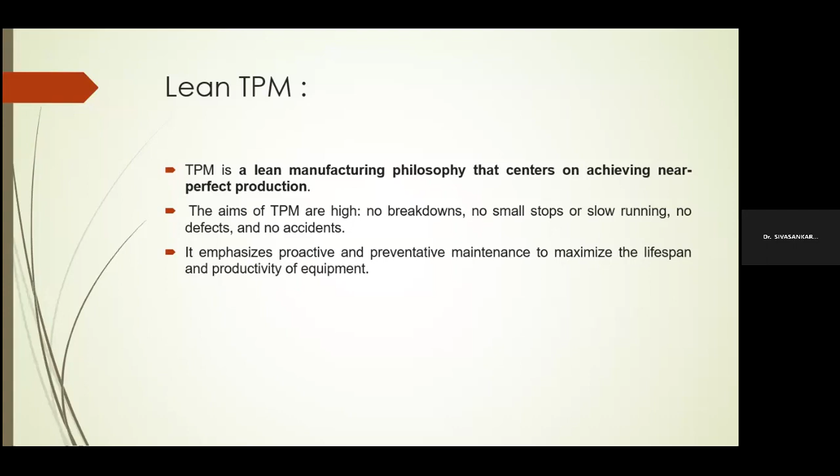So at the same time, the lean manufacturing strategy clearly focuses on both proactive and preventive maintenance systems to improve the productivity measure of the equipment. So the further presentation of the slide gives the following information.

So TPM mainly focuses on total employee participation, of their own machineries, tools, and other gadgets, whatever they have on the shop floor, in order to maintain the uptime - the production uptime. That is nothing but the availability of usage.

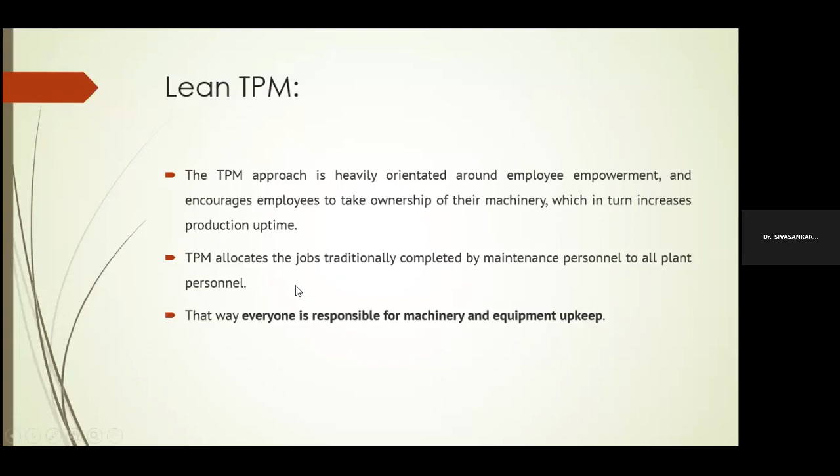So the machine should be continuously available during the production hour. None of the machines should be kept under idle condition, right? So this is everyone's responsibility for keeping the machinery and equipment operating under a continuous state, right?

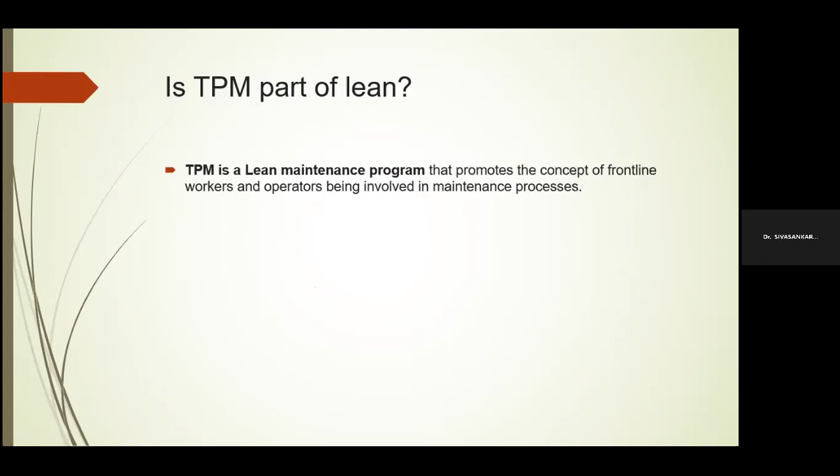So the TPM is just an overall guideline, under which we can form lean management tools and techniques in order to fasten the guidelines more optimally by educating the workers and machine operators who are involved in the maintenance process. It is just a sub-module. The lean maintenance program is a sub-module that can be connected to the TPM, the total productive maintenance.

There are some facts that tell how TPM and lean are equally related to each other. The goal of lean manufacturing is to minimize waste, like wastage due to overproduction and wastage due to over inventory. Lean manufacturing will not compromise with excess raw material inventory and overproduction. What is required to be manufactured and at what time we want to release the plan of schedule, that is a production plan of schedule. Everything should be streamlined in a well-defined manner to maximize production efficiency.

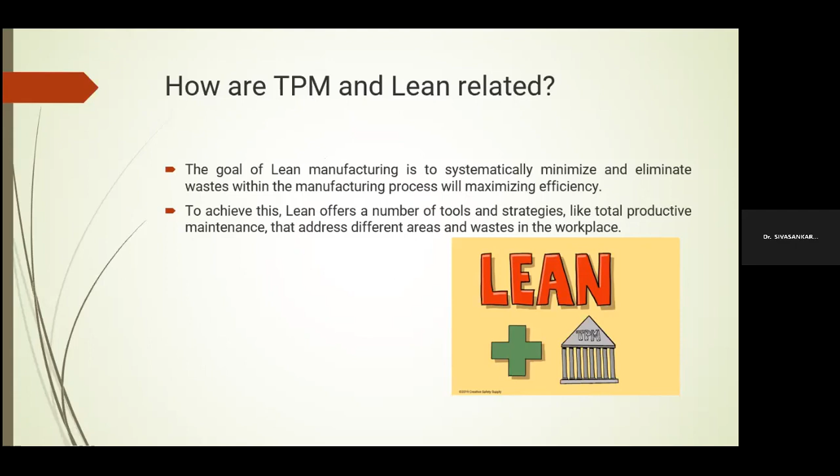To achieve this, lean has a number of methods like single minute exchange of die, Kaizen, Pokayoke, and just-in-time manufacturing. These are some of the tools and methods coupled in the lean management philosophy. The total productive maintenance aims to address different weaker areas by eliminating waste within the shop floor system. In this way, lean and TPM are interrelated with each other.

Coming back to the continuation, these are the remaining supporting information given in the next slide. TPM is one of the most challenging and difficult strategies to implement in a practical shop floor layout, because it requires people's contribution and understanding between people of different mindsets. So TPM expects teamwork and strong employee morale.

At the same time, they should have knowledge about each and every machinery and the parts' working function. If any part is not functioning well, they should know how to repair and rectify the problem. These kinds of skills the people must have, and everything should be done with strong morale without violating the basic professional ethics within the organization.

So this is the final point to be stated, interrelating both lean manufacturing strategy and TPM. Both are equally related to each other.

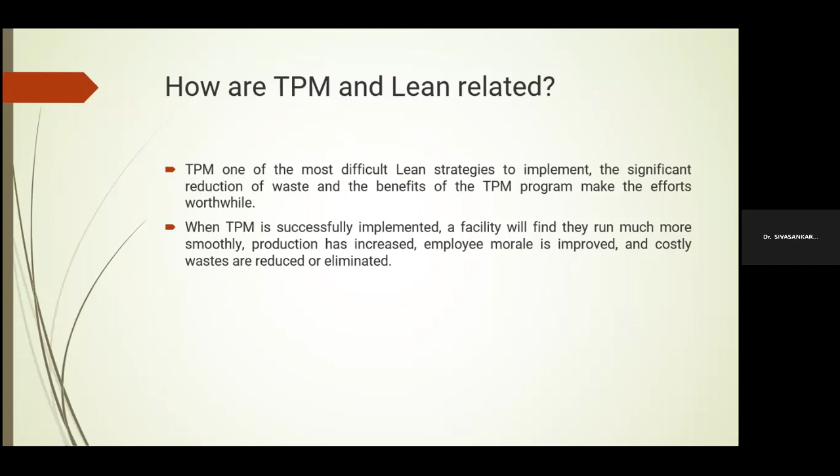So how to create a lean maintenance program first within an organization? As we already know, TPM has got 8 pillars that we saw in session 1, the introduction program. All the 8 pillars carry responsibility in improving equipment usage by maintaining them more dynamic and reliable, increasing the long service lifetime of the equipment.

While starting a TPM program, initially we should put effort into planning and decision making in order to undergo the proper idea of implementation into the real system. This will take a lot of contribution from training operators, forming middle level committees, performing evaluations in developing the plans, and much more. It requires a lot of people's support in implementing these work procedures.

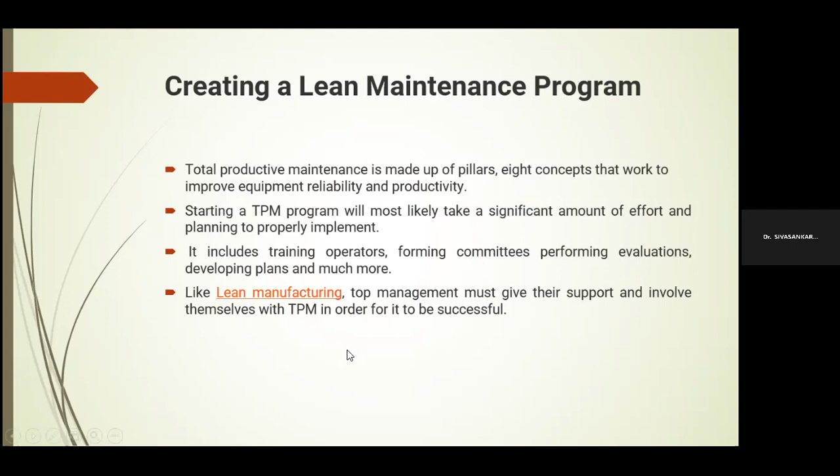Like lean manufacturing, the top management role plays a major thing that can be involved along with TPM to make the work process more successful and easier to follow. While creating a lean management program, you should understand what the problem is and how we are going to work it out, and whether the problem can be communicated better to people from various domains. We have to ensure that before forming any work procedures.

Now coming to lean thinking and methodology - how lean management can be brought more alive into the workplace along with the TPM strategy. The total productive maintenance system strives to improve and maximize the overall equipment effectiveness of a production machine tool, by reducing the number of accidents and careless mistakes done by the operator within a given hour of shift.

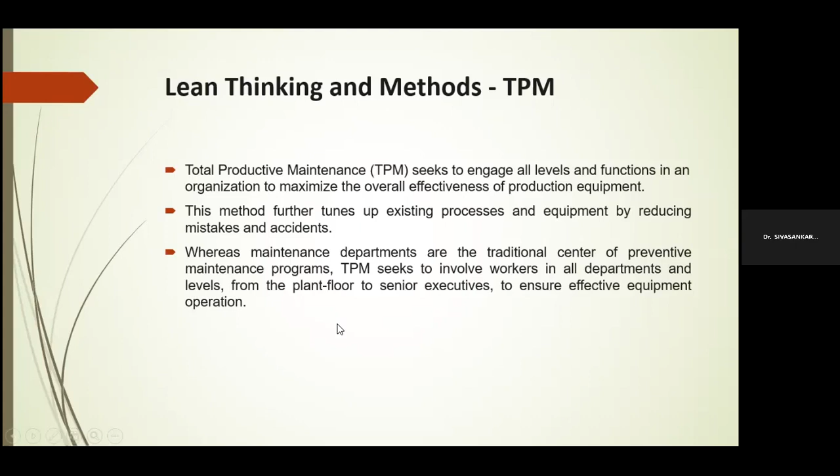The maintenance department in every industry is the primary center for all kinds of training programs and safety related issues that are implemented from time to time. TPM must seek to involve every worker from all departments within the shop floor level, starting from the plant floor to senior middle level executives, in order to make the proper functioning of equipment operation error free.

The TPM addresses the entire production life cycle and creates a solid build plan to prevent accidents and future defects and other breakdowns which are likely to happen every now and then. So TPM focuses on measures like the preventive maintenance system and mistake proofing, which is nothing but poka-yoke. These are the two things we are going to discuss in the methodology part.

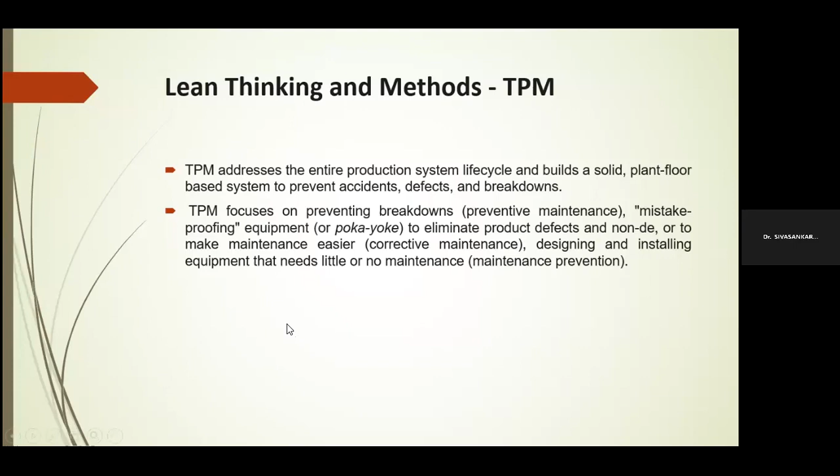By using these focused improvement techniques, we can improve the process procedures within a less span of time. So the goal of TPM in the lean concept is to eliminate a number of losses, say breakdown losses, setup losses, idling and minor adjustment losses. These are the different types of losses, and the root cause for these problems we are going to see in the next parallel slide.

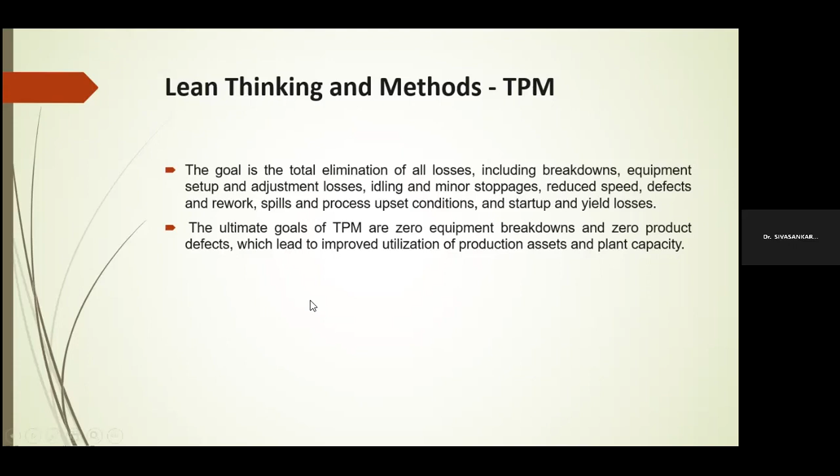The ultimate goal of TPM is nothing but zero equipment breakdown, which speaks about the improved utilization of machines, long usage of machines, and we can increase the plant capacity by producing more products by maintaining the equipment in a trouble-free condition.

Now we will see what methods and implementation approach we will continue with in the present slide. TPM mainly focuses on ensuring the successful functioning of machinery by minimizing the frequent number of breakdowns, by insisting on more efficient maintenance strategies like preventive, corrective, and autonomous maintenance.

So here we are going to see some of the losses, the 5 major losses. These result due to a number of faulty problems that may occur during the operation cycle. These are listed out here.

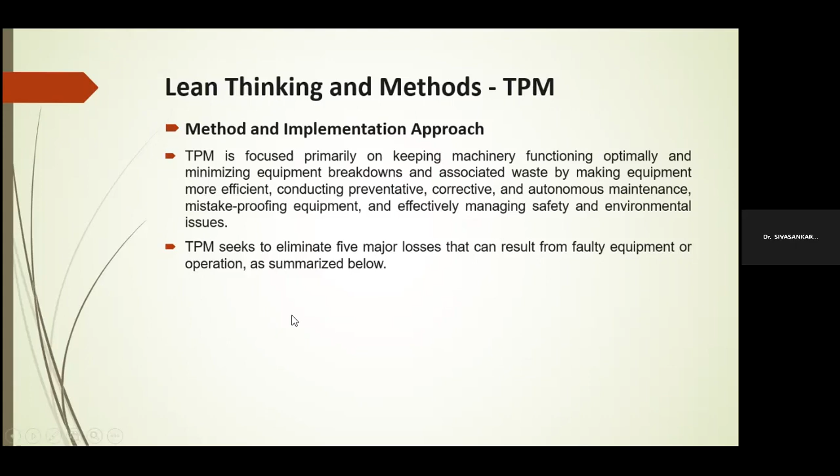The first one is unexpected breakdown losses. This unexpected breakdown failure happens due to the careless attentiveness of the labor, the wrong attitude of the shop floor management system, and non-availability of spare parts. These are the issues that may result in unexpected breakdown failure. We must have a strict, thorough maintenance schedule by doing some prediction well in advance before the failure happens. The next loss is setup and adjustment losses.

Here we can use the lean manufacturing concept, say the SMED principle, single minute exchange of die. Within a minimum time span, we can have a comfortable product changeover process without affecting the regular production duration. So we can optimize the setup and job adjustment time.

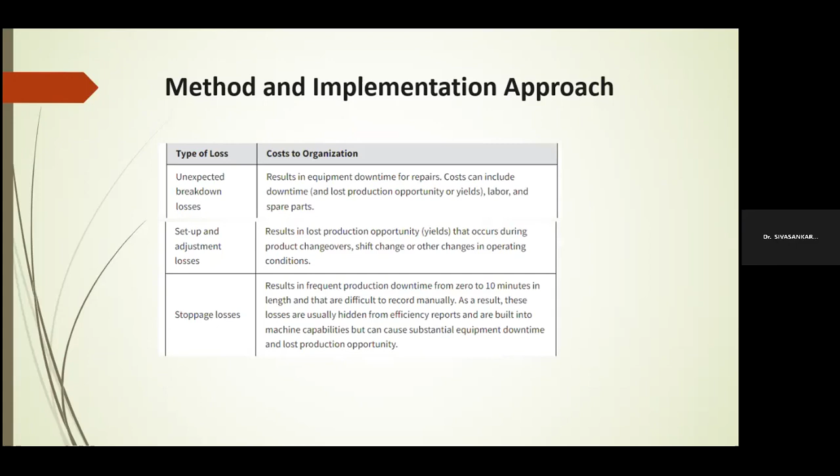Then stoppage losses, the third problem. Due to random failure, the entire machine will tend to undergo a frequent stoppage, which will lead to further malfunction. Here we need to identify issues by using poka-yoke, to see how to minimize defects if a system is running in a wrong procedure. For example, a machine running in a wrong sequence - we want to identify that before starting the machine, using the poka-yoke technique. I will explain that in the next consecutive slides under lean methodologies and concepts.

Speed losses: if any machine shows a reduction in speed operation, that leads to delay in lead time in completing the job operation. Due to the delay in lead time, that indirectly affects the quality of job completion. So every machine has to be reconditioned every time to increase the operating speed every now and then.

The quality defect losses - this is due to the usage of faulty machines, which will tend to have a number of stoppages depending on the poor performance of the machine, and finally that leads to affecting the finished delivery of the final product. So this can be considered as a mere waste from the lean strategy point of view.

The last one is equipment and capital investment losses. Here we can apply the concept of depreciation for equipment replacement, thinking about what could be the maximum replacement time period if you buy new equipment today - after 2 or 3 years, what will be the minimum depreciable sum, the salvage value of the equipment if it undergoes a frequent number of wear and tear, and whether we want to go for a group replacement policy by selling the entire machine, or individual parts replacement.

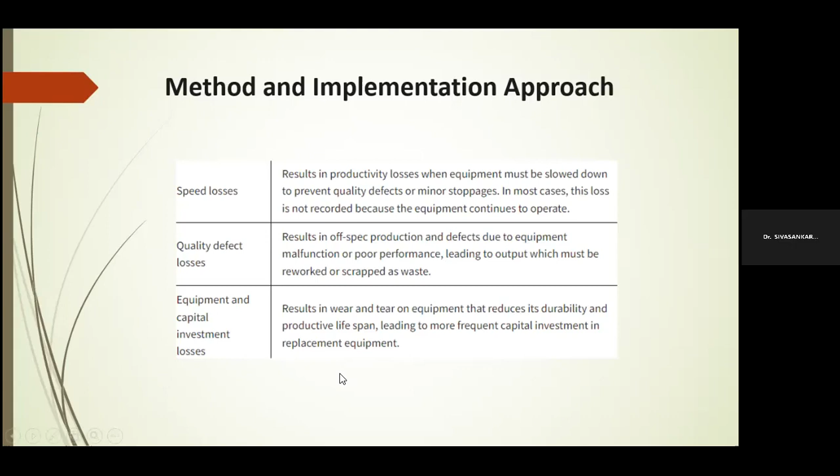So these are the different ways in which we can identify the problems occurring in machine losses and also the capital investment. We can rectify it by following proper procedures and streamlining the replacement methods.

Next, lean has got different dimensions, 7 different ways, but today we are going to take up only the 2 primary important methodologies: Kaizen and Poka-yoke, which is nothing but mistake proofing. In the future consecutive webinar, I'm planning to take up in session 4 the continuation of lean concepts, the different dimensions of lean management strategy, by taking a standard automobile manufacturing industry as a case study. So here we are going to discuss the different tools and techniques of lean strategy.

First we will have a preface about what is lean manufacturing and how that is focused to be more important in today's dynamic, ever-changing work environment.

Lean aims for making the system efficiency more easier. If there are 10 or 20 machineries working in a manufacturing shop, we want to identify the process capability of every machine, and also how many jobs we can load in a particular shift in every machine. So we want to study the machine capacity.

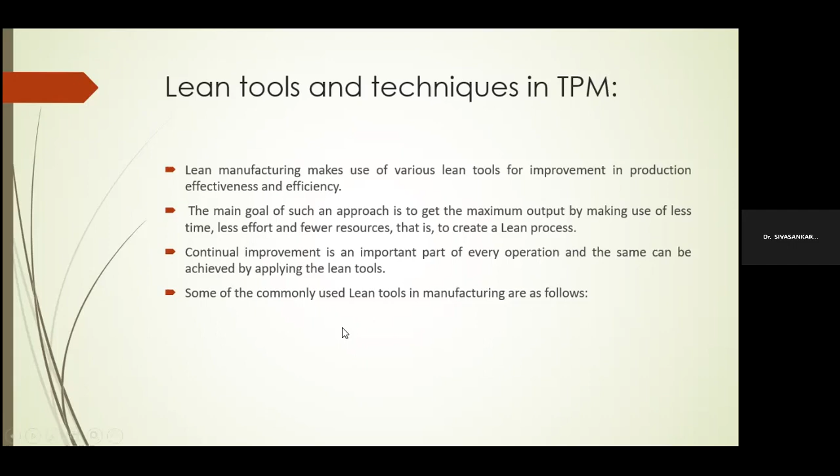The first one we are going to discuss is the importance of Kaizen. Kaizen is a Japanese term, and its equivalent meaning is nothing but continuous improvement.

Even a small, slight, marginal better improvement will lead to a lot of advantage in the production shop floor. Kaizen aims for marginal, continuous improvement in every product function and job operation sequence. Compared to breakdown maintenance, if we implement lean strategies like Kaizen, Six Sigma, and single minute exchange of die, we can optimally carry out all the production process with much more safety, without worrying about frequent accidents.

Kaizen aims for zero investment improvement - doing the things right the first time with the right attitude. It aims for 100% quality efficiency. These concepts can be implemented in customer service management systems and also in manufacturing industries, to deliver better performance.

So what are the different subsystems of Kaizen? As I told you, it is a continuous improvement process. So who are the different individuals who strongly support Kaizen as a continuous improvement process? First thing is teamwork - without teamwork, we cannot implement the continuous improvement strategy easily. Then the next one is personal discipline.

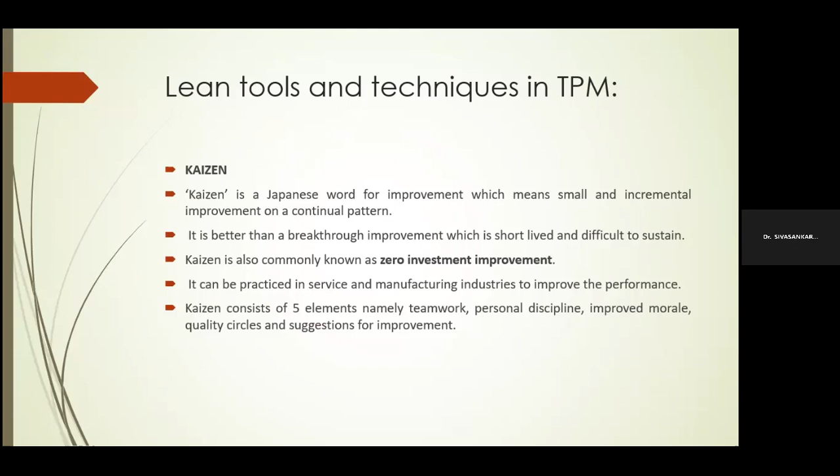The personal discipline should be there in every person, with an improved morale, then conducting frequent quality circles. These are the cross-functional operations that are highly important for having continuous improvement in Kaizen. We can also adapt the just-in-time manufacturing strategy and quality control strategy for supporting the efficient performance of equipment and streamlining the standardized work procedure. These are the subcomponents that support Kaizen as a continuous improvement tool.

Just-in-time aims for less waiting time for any job that comes to the shop floor. Within a short span of time, we need to sequence and schedule the job in the corresponding machine available inside the shop floor. There should not be much waiting time for searching for a tool, a job, or any other machine. So without sacrificing quality and productive time, we want to implement just-in-time with thorough understanding.

Human-to-human understanding is more important in every industry, even though we speak of zero productivity loss, that is zero perfection. We have to bring all these just-in-time concepts more to life, with proper strict guidelines and discipline. Without that, we cannot make it more successful.

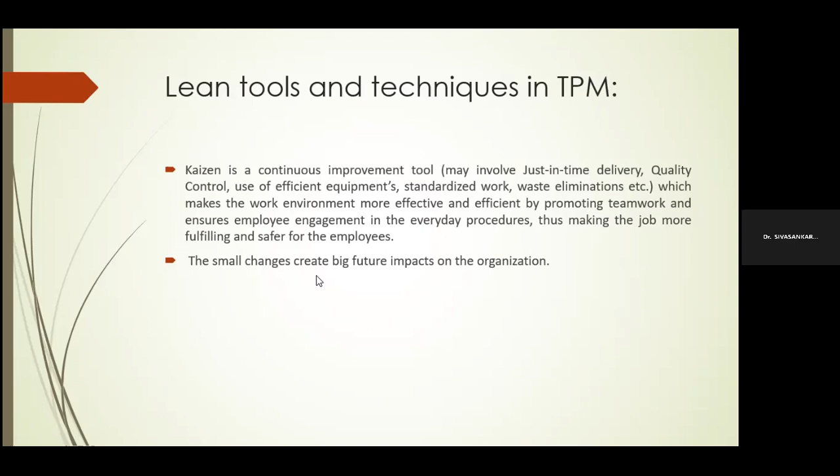The next method, as I told you, is mistake proofing, the Poka-Yoke. It is a Japanese term - we used to say Poka-Yoke. It is nothing but mistake proofing: detecting the error before the failure happens in a particular equipment, which can be a mechanical device or an electronic device. I can share my own experience in my lab, that is the metrology and measurements lab.

A few months before, I replaced a load cell sensor in a force measurement kit. For about six months, I could not get a better force measurement reading. I did not know what the problem was happening inside the equipment module. After disassembling all the segments of the equipment, the technician found that there was wear and tear in the load cell sensor, so it had to be replaced with a new one bought from the supplier. This is called mistake proofing.

We want to detect the problem before it happens. By eliminating the mistakes and replacing them with certain remedial procedures, we can make the process run more successfully.

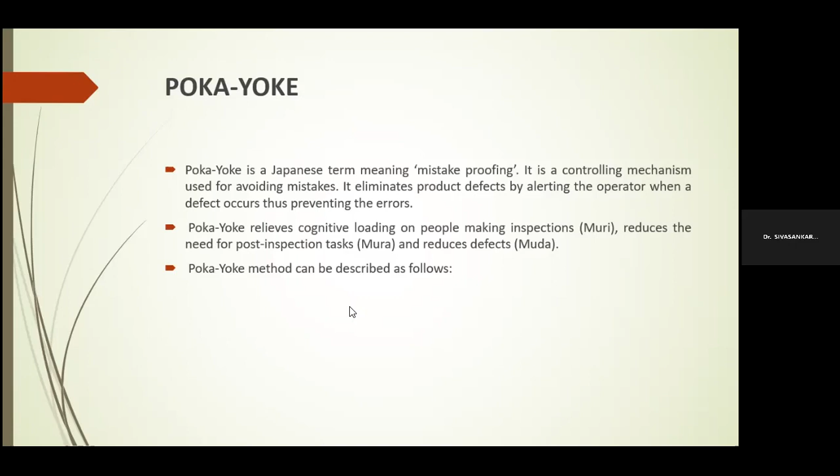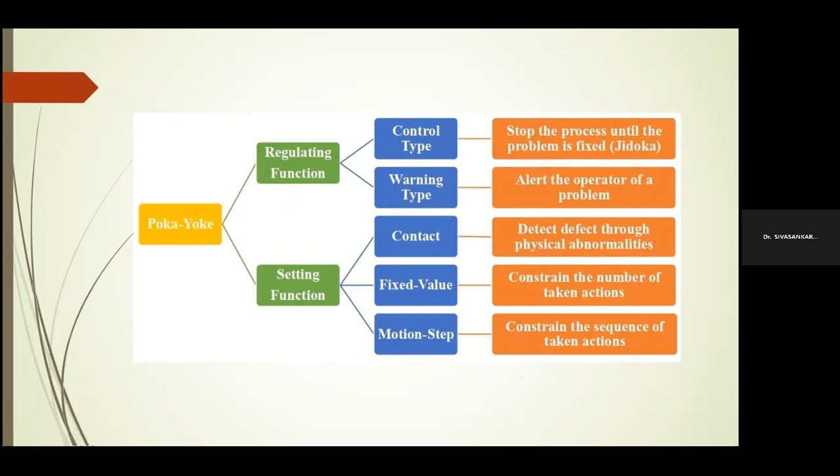The first one is a regulating function, and the last one is the setting function. In the regulating function, we need to scan the problem, brainstorm the problem, then after identifying it, fix that this is the problem, then collect the past historical data - how many times the same kind of problem happens - then decide in what way you are going to re-implement the new set of actions as a remedial measure. This is the way Poka-Yoke works, as shown in the flowchart.

We have to avoid the need for overthinking the process - that is the primary aim of Poka-Yoke. So when the process or any machine operation goes in a wrong sequence, immediately we need to stop the entire process and start thinking about why this problem happens, in order to pinpoint the defects.

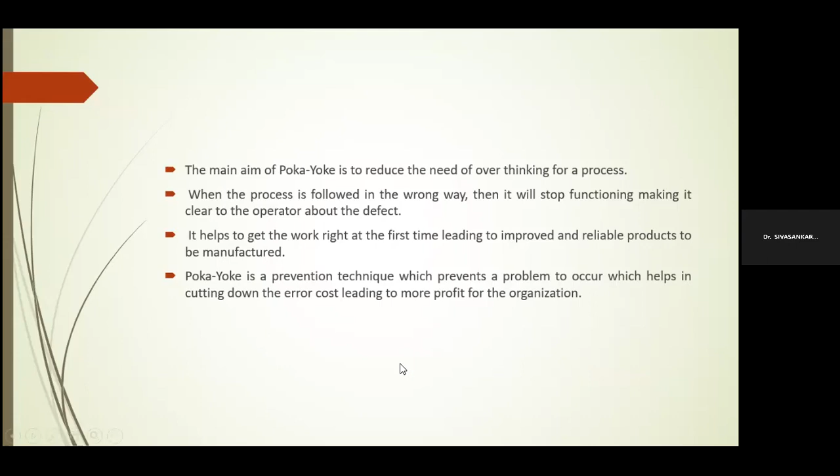So Poka-Yoke is an error prevention technique. This is about the lean tools and techniques. There are some other tools as well, which we will discuss in the next consecutive webinars in more detail. So I have presented today only two different tools: Poka-Yoke and Kaizen, the continuous improvement strategy.

Now coming to the sustainment of lean culture. If you want to make the lean management system successful, we want to focus on four major areas. First, focus on the customer. Every organization should work for the customer in order to promote better understanding and a long-term bonding between the customer and manufacturer.

Then create a proper vision for the company. If the vision is not clear, the company's operations will be drifting every now and then, and it will never land up in a proper destination. So the vision should be much clear.

The next one: establish proper performance metrics. Your problem goal statement should be proper, and that should be evaluated by sharing with all the fellow colleagues. Then provide sufficient lean training, so by eliminating waste, how we can excel ourselves in lean management strategy.